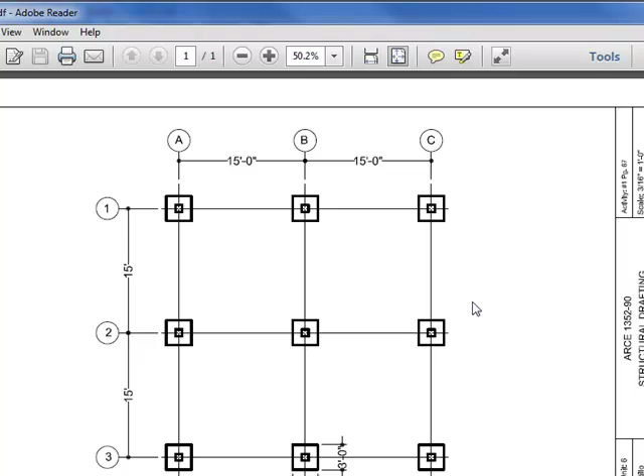This is the one where you had to do a column framing plan, a beam framing plan, and a column schedule. And this is pretty close to what it should be. It's all black and white. The only thing I think I commented to her on here is that the column lines should be phantom, and they should be a little bit lighter than the rest of them.

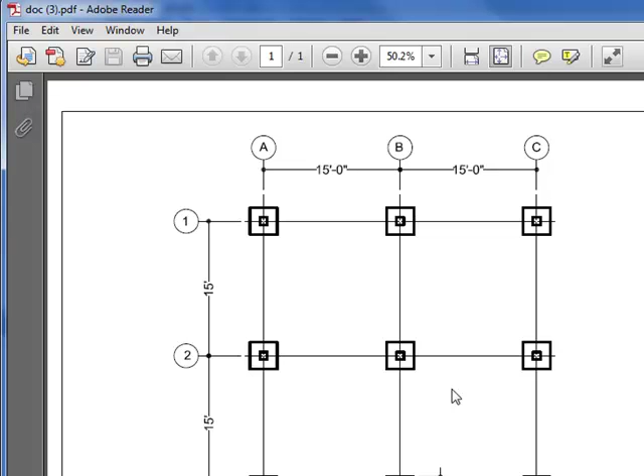She's got her column bases at 3 feet. She's drawn that, and she's drawn the columns. You need to draw the columns in the column framing plan because that's what it is. And you need to try to draw them to scale. Some of you have just drawn little X marks or something, and that's not proper for a column framing plan. She's dimensioned them right there, and she's labeled the bubbles. So that's what the column framing plan should look like in general.

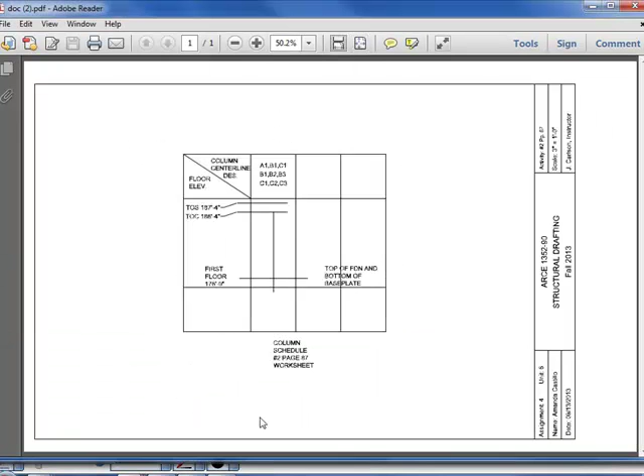Then, let me see, the column schedule, what she did next, she did hers more like the one in the book, but you can see that we really only have one column type, so you only have one. All the columns are listed right there. You have the height of your column listed.

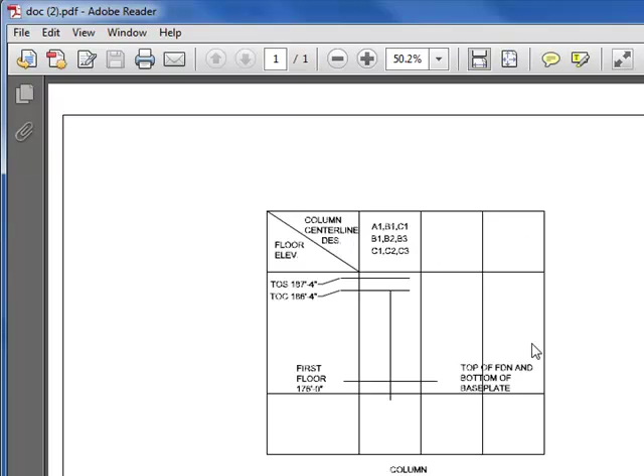You've got the first floor, top of foundation, top of column height, top of steel height, and this line here, floor elevation, that's what that means, and column center line designation is what that would be. And then if you had different types of columns, you would keep drawing them over this way. So there's the column schedule.

The other thing on that assignment was the beam framing plan. And here you have the beams, of course, and you have the columns drawn again. The only thing she's missing here that needs to be on this is the column lines. That needs to be on all the plans. When you're moving from plan to plan in a set of drawings, you have the column lines on all plans, because that's how you can identify.

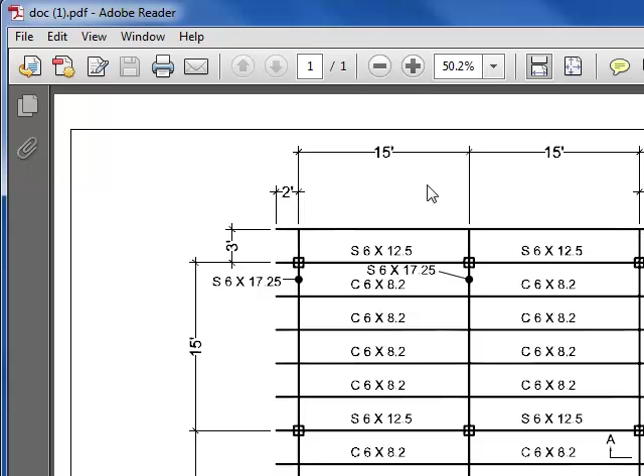You're calling somebody on the phone and say, I need you to look at column A1. If I was looking at this, I couldn't tell where column A1 was, so that's why you have the bubbles on there. So you just need to copy those over on each plan. She listed all the beam types and the section marks. I might make the section marks a little bit heavier, but in general, that's what it should look like.

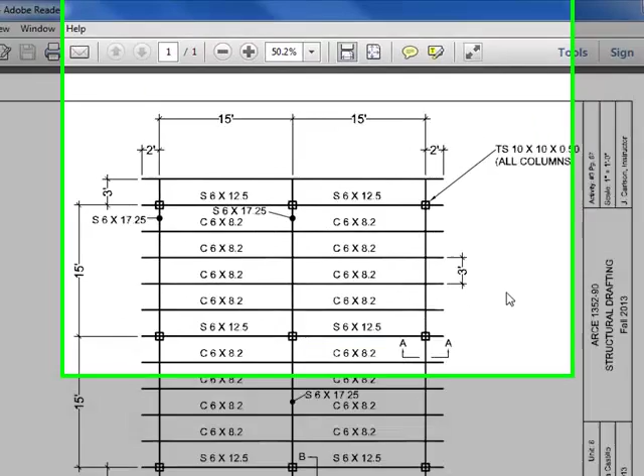If you hand them in later, the other parts of the drawings, and I've already slashed you, then make a note, say, I've got the rest of it now, can you fix my grade, or something like that. So are there any questions on what you need to do? This is Assignment 4 for Unit 6, which should have been due last Thursday, but what we were working on last week.

Any questions? On mine, you commented that some of the lines were gray. Depends on the color that it was. Well, I did the thing like you said where I highlighted all the colors, so I wouldn't mistakenly use a color, and then I turned them all to black. So I don't understand why it came out. Maybe it was just the way the PDF printed it. Yeah, I think maybe when I did the PDF, I put grayscale. I think that would have changed it, but I had already highlighted all the colors and turned them to black.

Well, gray's better than colors. But it cost me a lot of points just because the lines were gray, so I was like, let me look at it again, why did they come out gray? Call me when I'm done talking and I'll come back and look at it.

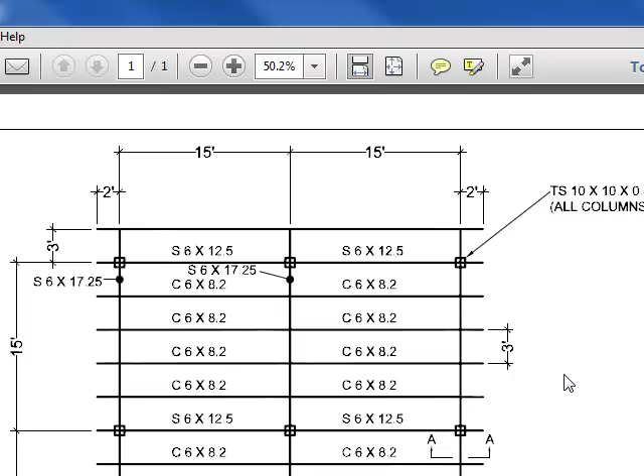Unit 8 is what I was going to start discussing. But I can hold off if that would confuse you. Or do you want me to go over Unit 8 and then y'all just keep working? Is that what you want me to do? Okay. So Unit 8, let me get this off of here. On Unit 8, hold on.

Unit 8 talks about structural steel connection details, and you're going to be drawing some of those after you're through with the Unit 7 assignment. Connection details in structural drafting are used to show exactly how all structural members are to be connected during the erection. They are very similar to sections, except they are much more detailed and they isolate the area in which the connection is located.

So they're more like what the fabricator would probably draw, not at the engineer's office, but at the steel fabricator's office. They would draw these connection details and then send them back in shop drawings to the engineer to check and make sure it's all according to what he said. Nowadays things are bolted or welded. We rarely use riveting anymore.

And the connection details you need to be concerned with are column base plates to the foundation, where columns are spliced, and connecting beams to columns and beams to beams. So base plate connection details, if you have your book, you can see on page 103 what those would look like. You only need to show the part of the foundation that pertains to your detail, so they didn't show the whole thickness of the foundation. You can see there's concrete, then some grout, and then the anchor bolts drawn to scale. Since you can't really see the anchor bolts, they're shown in a dashed line, which is what you need to do.